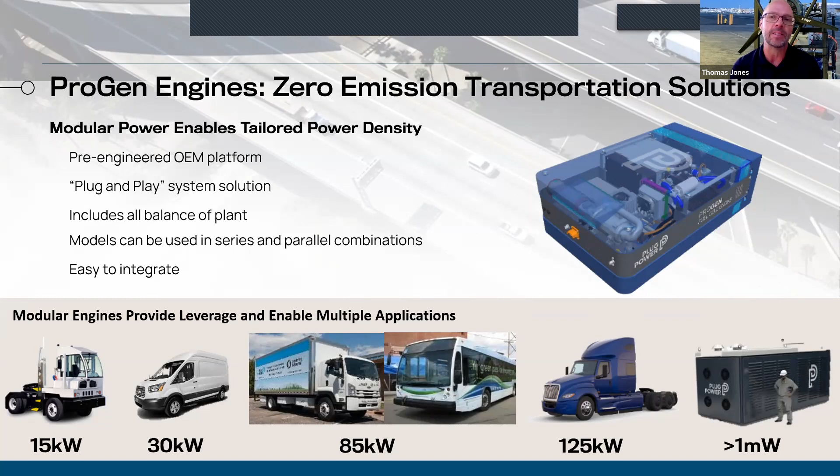But we realize also that typically something developed for an on-road transportation application is too heavy for aerospace. So we've started the activity now to understand how this on-road transportation system could be transformed into aerospace applications. And of course, the first place to start is this fuel cell stack. So we're looking at opportunities at this level first, to really reduce weight. And we've got a really great path forward.

We're taking the stainless steel stack that's used in the ProGen 125 kilowatt engine and converting it to titanium plates. And by doing that, we can bring just the stack, so it would be considered 145 kilowatts gross, we're bringing the weight of that stack down below 50 kilos, which we think is leading from an industry perspective.

Now, we also know that that's just a starting point. It's not just the stack we have to worry about. There's all the balance of plant, there's all the nuts and bolts, there's the coolant, there's everything. So we're really trying to attack this from a systems level. And we know how important it is to reduce the weight of everything, not just the stack. But with that said, we think the stack is a very good starting point.

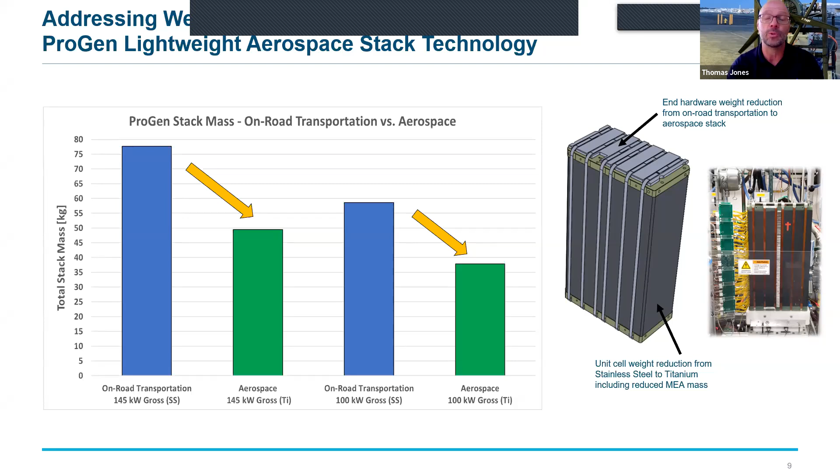So the stack you see here off to the right-hand side, it's not just the bipolar plates that we're trying to reduce the mass of. It's the end plates, it's the compression system, it's the actual unit cell, the MEA, the gas diffusion layers inside. We're really taking a holistic approach to the whole thing, looking for opportunities to reduce weight across the board.

With that in mind, I wanted to look at a specific example, and we think there's a real value proposition for fuel cell battery hybrid systems for eVTOL aircraft applications. And the reason why is the fact that we can extend the range in a more weight efficient manner by adding fuel and fuel storage. Another aspect is fast refueling compared to battery charging. So we'll take a look at that as well. And of course, last but not least, the zero emission aspect is obviously pretty important.

So we take advantage of the two strengths of the two different technologies: fuel cell systems for high specific energy, so energy per unit mass, and this gives us longer endurance. We take advantage of the high specific power of lithium ion or lithium polymer batteries, and this is power per unit mass. And this is important for takeoff and transition.

So we believe that with this hybrid approach, we can provide between 2 and 6 times more energy on board than for the pure battery case. And of course, as we'll see in a minute, the aircraft has to be able to carry some weight in the first place.

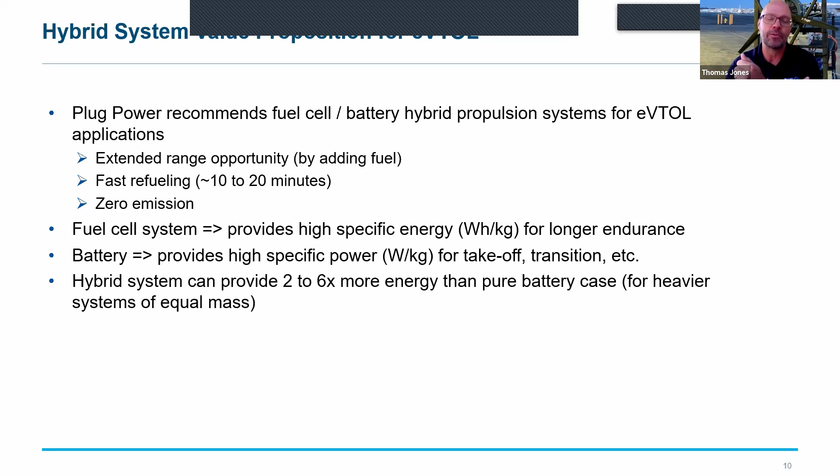So if the aircraft is designed not to do that, if it's designed to only fly for 20 minutes, then I'll show you that batteries actually make more sense for that scenario. But if endurance is important, this is where we think there's an opportunity. So what I put together was kind of a generic power profile, and this is generic. It's not aligned with anyone's platform specifically.

The idea is, there'd be a takeoff and landing, and that would be in the range of about 450 kilowatts for about a minute in duration. There'd be a transition period as you transition from the vertical takeoff to straight and level flight, and that transition would take about 300 kilowatts, and that would be for a minute. And then cruise power would be 150 kilowatts for the remainder of the flight.

So I factored in the 10% energy reserve too, and I wanted to consider 2 different scenarios of reasonable flight time: an hour flight time, which would require 165 kilowatt hours of total energy, and then a 1.5 hour flight, which would be about 240 kilowatt hours. So the assumptions made here are, there's a little bit of hand waving going on, but some of these assumptions I think align with reality.

For the pure battery case that I'll compare, I assumed an overall pack level specific energy of 170 watt hours per kilogram, which I think in some cases is generous, once you add the harness and the support structure and so on. For the hybrid fuel cell battery case, the hybrid batteries on board are not light. They have to be able to deliver very high C rates of power. So what that means is that they're not the lightest on the market.

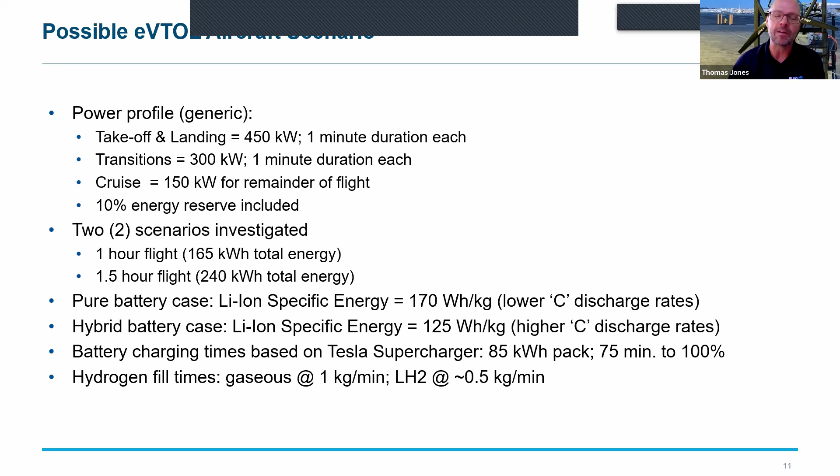And then the hydrogen fill times as a comparison, we can fill tanks with gaseous hydrogen at about 1 kilogram per minute. And for liquid hydrogen, it's a little bit slower because the tanks have to be pre-chilled. So the assumption there is about 0.5 kilograms per minute. So that's the basis of the analysis that I'll show you, and some of the assumptions as well.

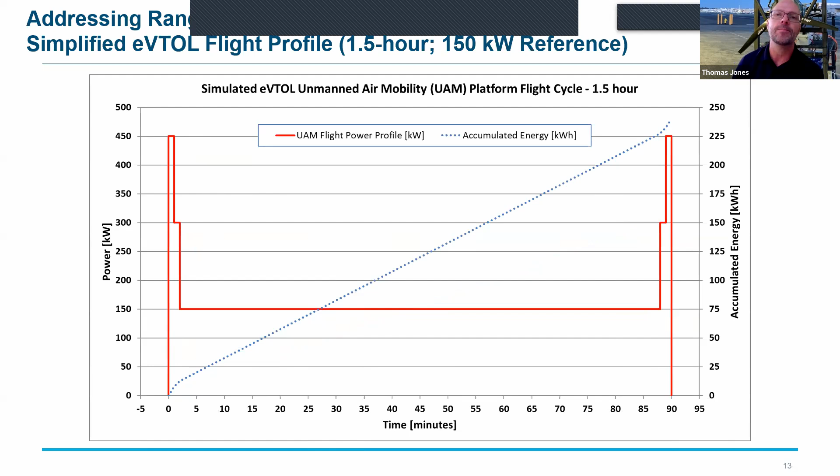So back to hybridization, I think the fact that you're not going to try to build a fuel cell system to provide the maximum power of 450 kilowatts is very important, because as you saw during the takeoff and the landing, it's just for a very short period of time. So if you can rely on batteries for that and basically provide the base cruise power plus some margin from the fuel cell, then with the marriage of those two technologies, you can optimize.

And it's different for every platform. It's different for a fixed wing to a multi-rotor to an eVTOL aircraft. So if you can imagine, the green line that you see on the chart would be your base cruise power. You can see that anything over and above this would be supplemented by your hybrid batteries. And then when the power level is below this, you could actually be charging the batteries in flight. And you can move that green line up and down, depending on what the duty cycle and power profile looks like. And so that's kind of the idea.

So fuel cells, again, are good at providing specific energy, energy per unit mass or watt hours per kilogram. And batteries are good at providing specific power. So putting the two technologies together, you get the best of both worlds. And as I mentioned, you can optimize it for a given duty cycle.

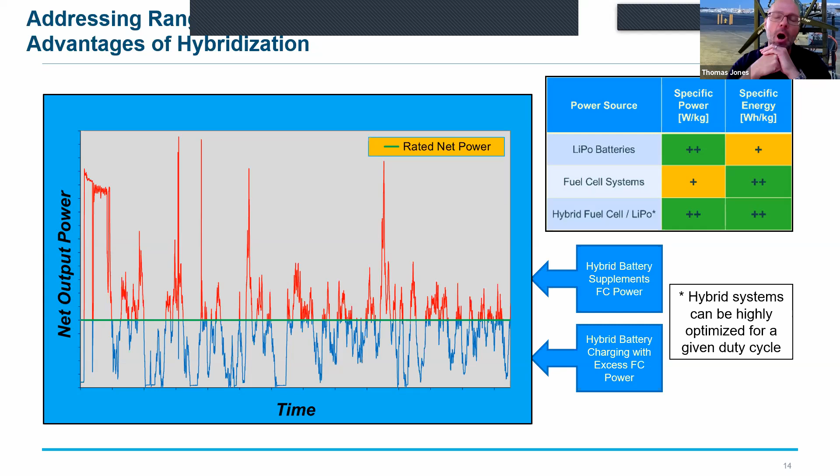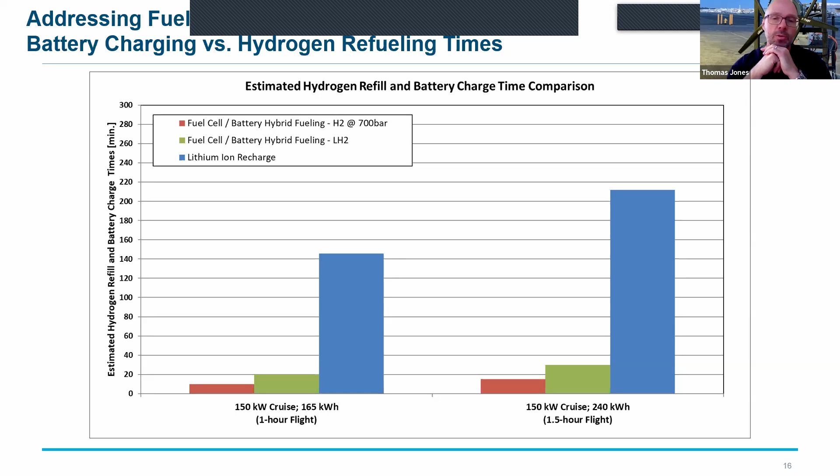And it's big, it's 2 megawatts per side from a gross power perspective. And this would provide the aircraft upwards towards 1,000 kilometers. So you can imagine the technical challenges behind the development of this scale of power plant are steep. But again, we truly believe that it's based on the fundamental engineering of smaller systems and on-road transportation and all the other fuel cell systems that Plug has developed. We believe there's a path to success, to reduce the weight for these kind of applications and to make sense from an aviation hydrogen ecosystem perspective.

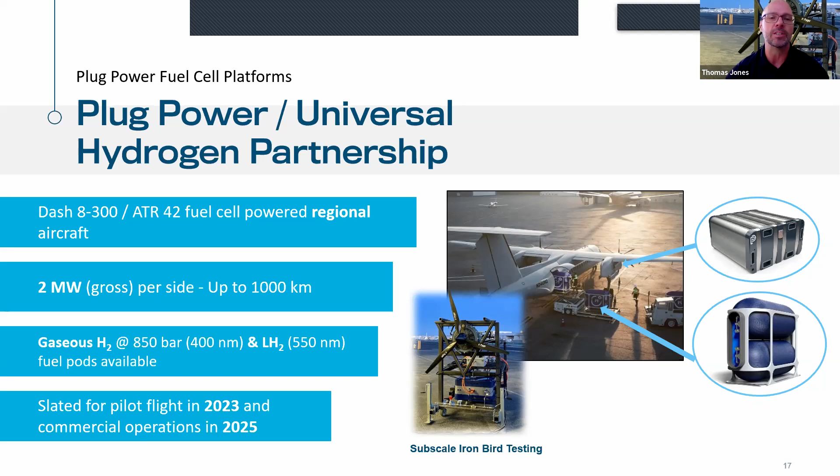But that's not the only place we're focusing. We're focusing not only on the aircraft and hydrogen, but on material handling on the ground at airports. And we think this is all part of the equation as airports transform into various different kind of fueling opportunities, whether it be sustainable aviation fuel or hydrogen. I think each of those scenarios involves some ecosystem, right? And if there's hydrogen available at the airport, then the rest of the equipment can possibly operate on it as well.

And to give you an idea of how we're going to do that, it's really got a lot to do with vertical integration. As I mentioned, of the 4 business units, 2 are focused on producing renewable green hydrogen and producing electrolyzers to make that renewable green hydrogen. And plugged into the fuel cell activity, I think we'll close the loop on the whole ecosystem approach. So Plug's going to be involved with not only hydrogen generation, but liquefaction, the logistics of moving the hydrogen and getting it to the customers, and obviously the customer equipment, fuel cell systems which are operating in all of these different applications.

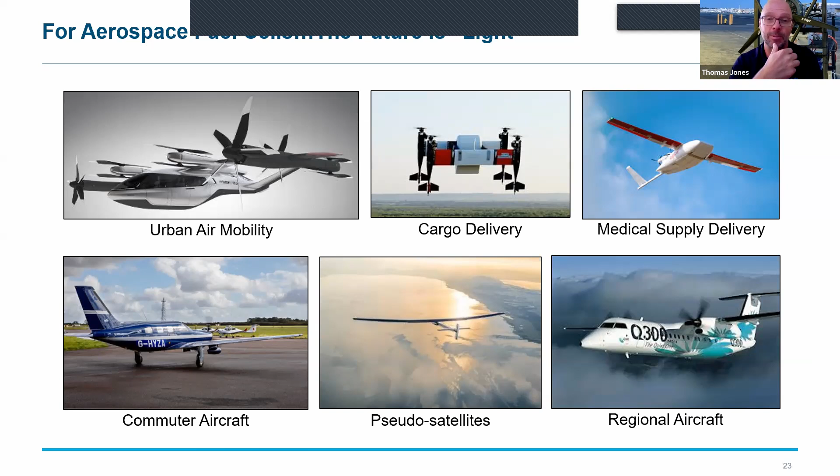And with that, I really believe that this technology, fuel cells and hydrogen, can be applied, first to these systems that you see on the slide, and maybe eventually up into medium range aircraft. And who knows what the future holds going forward beyond 2030 and 2035. But it's a pretty exciting time, and personally, I'm pretty excited to be involved with it and move forward together with Plug Power and together with you, as a team and with everybody working on this effort.

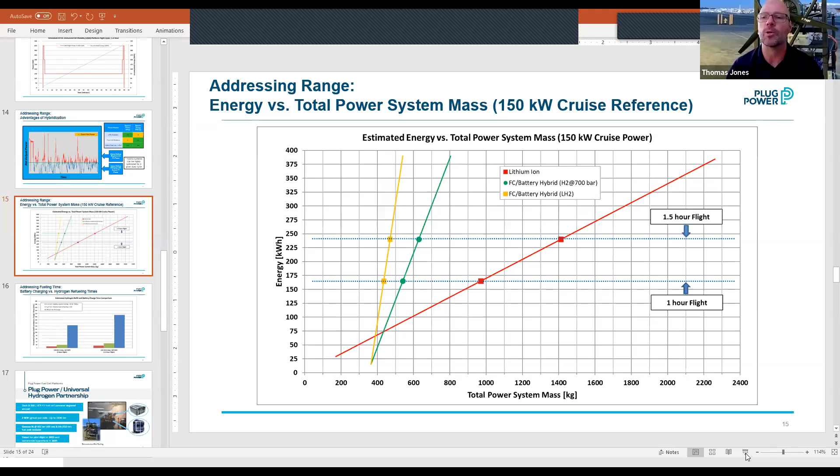So for the gaseous hydrogen scenario, I use 5.7% weight storage, which aligns with the Toyota Mirai, which I think is one of the most optimized gaseous hydrogen delivery systems available. And the yellow line is 14.7, which is just below 15%, which again has been done in a real world application. So that's what those refer to. Thank you.

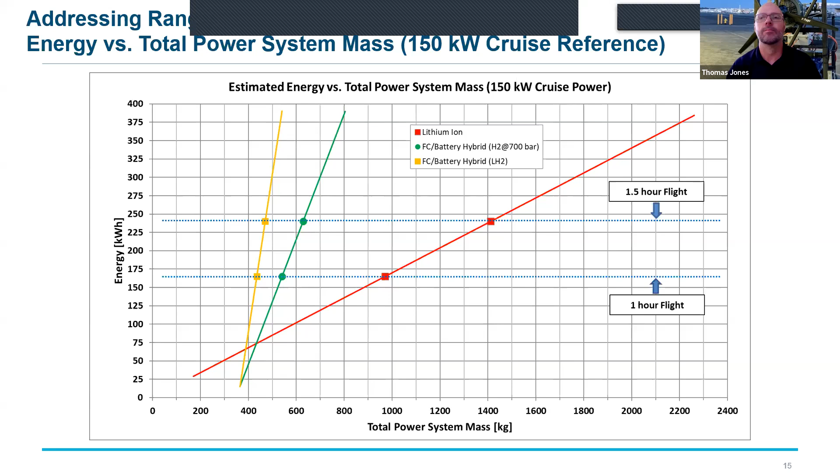Has Plug Power looked at ammonia as a hydrogen vector for transport and storage versus liquid hydrogen? Our CEO has talked about that, and his response was, our focus going forward will be really on renewable green hydrogen, producing it where it makes sense to produce it, where there's cheap electricity, and transporting it more locally than longer distances. So I don't know. My impression of what he said was that ammonia wouldn't be part of our future necessarily. It would be more focused on renewable green hydrogen, liquefying it. And as you saw on the map of the US, strategically locating these plants so that they're close to customers.

Could you comment on the advantages of an 850 versus 700 bar pressurized tank standard? Yeah, I think it's a good question with Universal Hydrogen. I really believe it's just a function of volume, right? Because as you go higher in pressure, you can't necessarily make the tank lighter. But the advantage is that it can be a tiny bit smaller.

Universal Hydrogen is taking the lead on their pod development, which are both gaseous hydrogen at 850 bar and liquid hydrogen, of course. And they're sizing those pods based on the aircraft, based on the space available in the aircraft. And that's how they chose to move forward with the higher pressure.